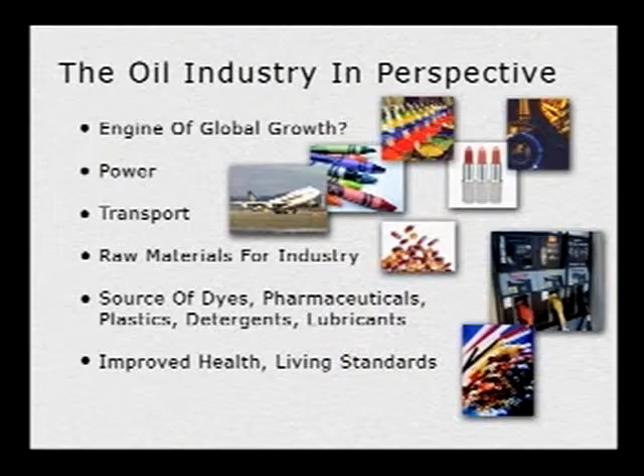And just a few of the sometimes trivial but sometimes extremely important things that oil produces, seen there. Of course, my flag carrier, Singapore Airlines there.

But let's talk about the public perception of oil. There is a big perception out there that oil companies are unscrupulous multinationals, that we as an industry show little regard for nature, and that the oil industry is dirtier somehow than other industries. And of course, there's a very common misconception that practical alternatives to oil exist.

This is the kind of stuff that we are all familiar with, the petrochemical industry, which of course is downstream from our own industry, but plenty of nasty pictures of industrial pollution. If we go back to our side of the business, on the upstream side, these are the kinds of things that you may see in newspapers. And unfortunately, it doesn't present a very good picture of our industry.

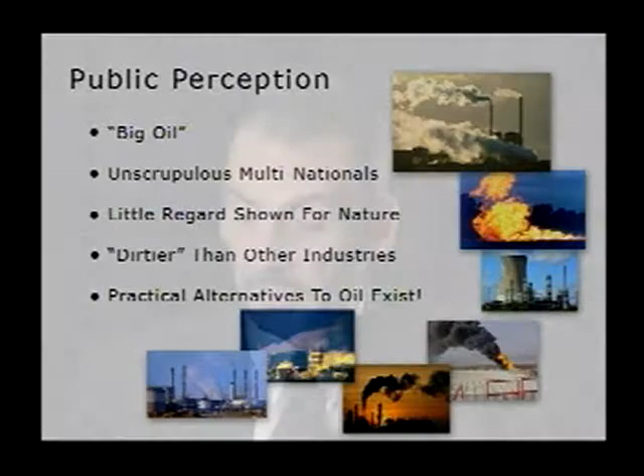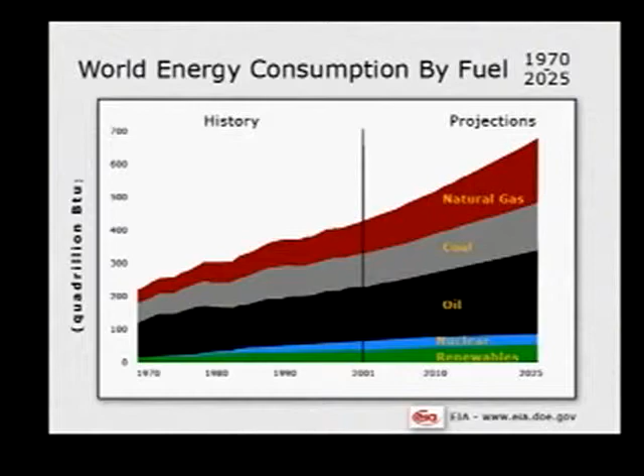But let's be serious. If you take a look at world energy consumption, then oil is going to be with us for a very long time. In fact, oil is going to increase in consumption over the next 25 years by some 50%. Natural gas also is going to increase, but you can see out of the overall proportion of the fuels that we're going to be using 20 years from now, the vast majority comes from hydrocarbon sources.

You may look down at the bottom of that graph and see renewables and think, well, that's good, we're moving towards renewables, and think of wind and solar energy. But in actual fact, the vast bulk of those renewables is hydroelectric and biomass. And in fact, the other fuels, the solar and so on, represent less than 1% of that total production. So oil is going to be around for a long time.

Now let's talk about the pollution issues related to the oil industry. There are many. Obviously, habitat disturbance and disruption is something that sees quite a bit of press attention. All the paraphernalia associated with our business of oil exploration. Then there is the decommissioning of facilities. And in the last slide there, you may have seen a picture of the Brent Spar, a famous structure in the North Sea that an oil company wanted to take out and dump in the Atlantic Ocean. At the end of the day, they were unable to do that due to extensive pressure from NGOs and the public.

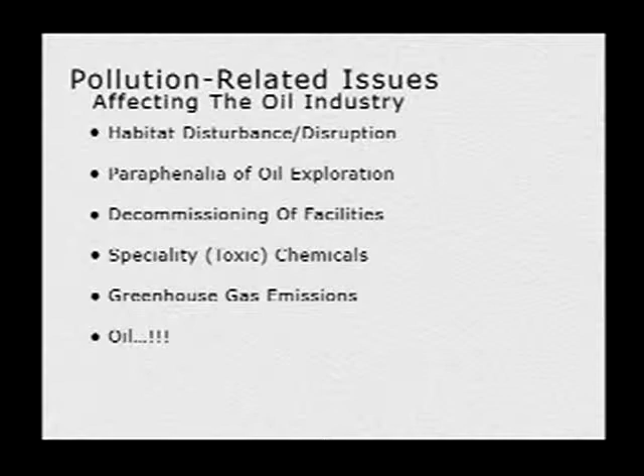The speciality and toxic chemicals that we do use in our business, of course, are something that we're going to talk about in this presentation. It wouldn't be right either to talk about pollution issues if we didn't talk about greenhouse gases. About 26 billion tons a year of carbon dioxide from our consumption of hydrocarbon fuels, and clearly that's an issue that's gaining a lot of press attention.

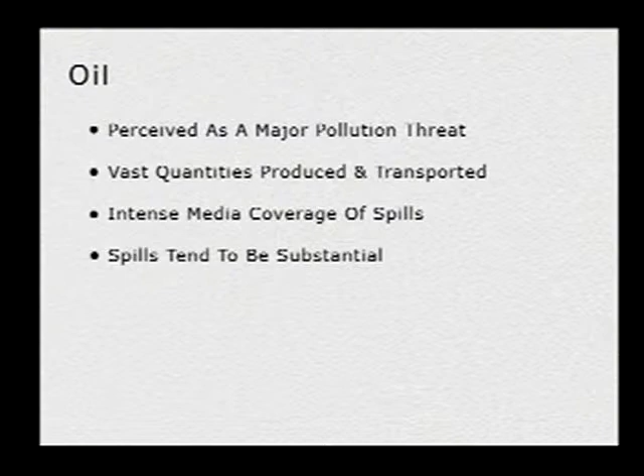Finally, there's oil itself, and that's really where we start to look at pollution. It is perceived as a major pollution threat. Vast quantities of oil are produced and transported. Currently, the world is consuming about 84 million barrels of oil a day. So obviously, the majority of the markets for that oil are far removed from the production areas, and it has to be transported.

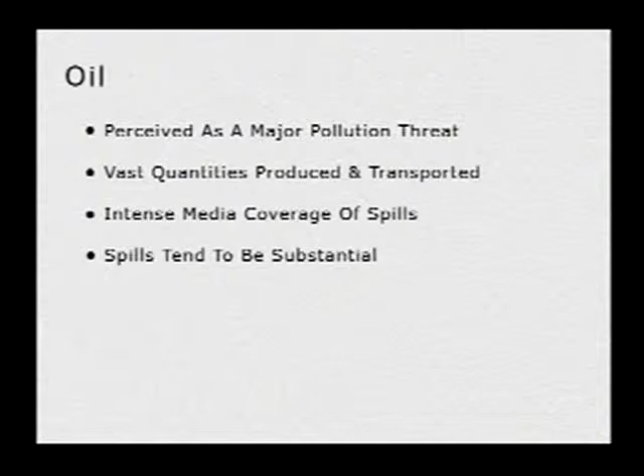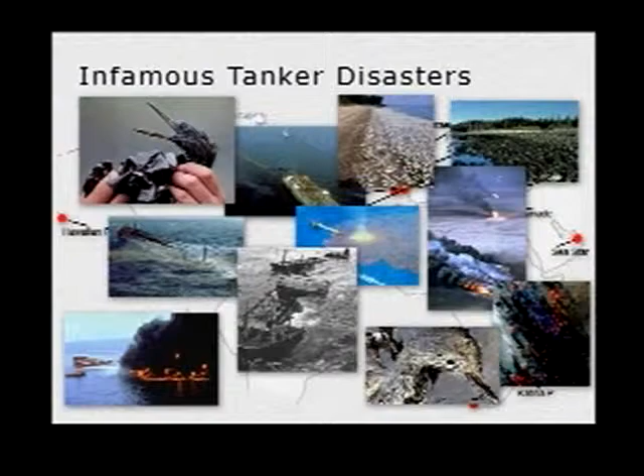When there is a problem, for example, a spill, there's intense media coverage of that spill. And those spills, because of the prodigious quantities that are required every day to feed our world, tend to be substantial. There are numerous infamous tanker disasters, and I have a map here showing some of them scattered around the globe. You may notice up on the far left-hand side the Exxon Valdez, a rather infamous accident. But there are many, and the kinds of pictures that you may see from tanker disasters, of course, are fairly common. Not very pretty.

Then there was the case of the retreating Iraqi forces in the first Gulf War, releasing a lot of hydrocarbon into the environment, deliberately destroying wellhead pressure control equipment, releasing a total of about 11 million barrels of oil into the Arabian Gulf, and a total of 150 million barrels of oil from the destroyed wells. And of course the consequences are, again, fairly well described in the press. These are the kind of pictures we're used to seeing.

But there are some facts that we need to consider. Oil is a natural product. It routinely seeps to surface in many, many places. In fact, many oil-producing areas were first discovered as a result of natural seeps to surface. Of the approximately 1.3 million tons of oil a year that enter the oceans, 600,000 tons are from natural seeps. In actual fact, we could even claim to help this situation by relieving the pressure from downhole reservoirs and reducing the seep rate into the oceans. So about 45% of the oil that enters the oceans comes from natural seeps.

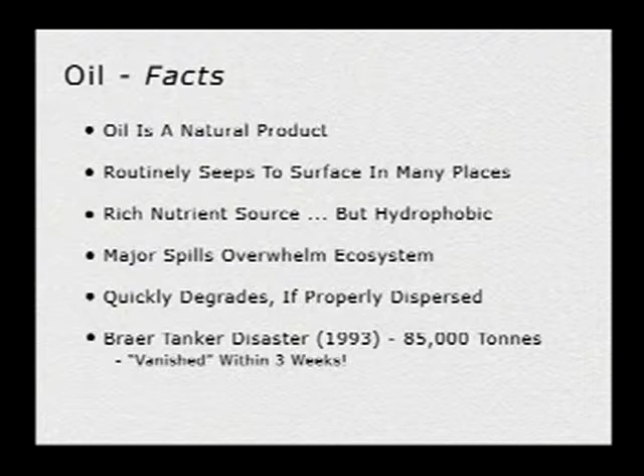If you look at the total input from our industry, that's the E&P industry, into the oceans, it constitutes about 38,000 tons per annum, about 3% of the total input into the ocean. So trivial in comparison with natural processes. Now, oil is a rich nutrient source, but it is hydrophobic. It repels water. And major spills tend to overwhelm the ecosystem for a short period of time. But it does quickly degrade if properly dispersed.

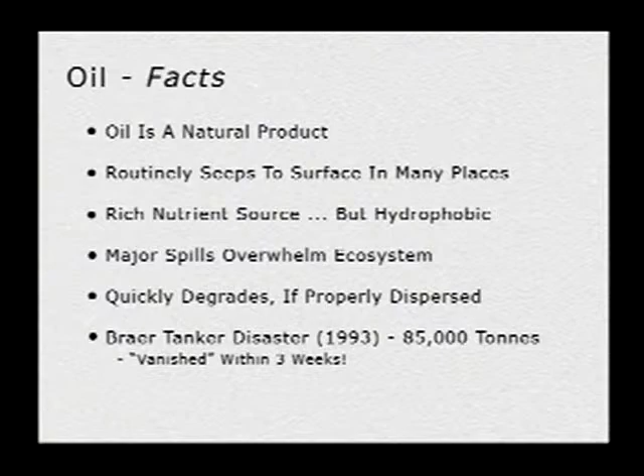In the Braer tanker disaster in 1993, a ship carrying Norwegian crude to a refinery in Quebec was caught in hurricane forces off the north coast of Scotland. She went aground, and most of her 85,000-ton cargo leaked out into the sea. Unfortunately, they couldn't do anything for days because of the extreme weather. They couldn't get near the wreck. Three weeks later, most of that oil had vanished. They could hardly find any traces of it whatsoever, proving the enormous power of the wind and waves and the ability to disperse and disrupt the oil slick.

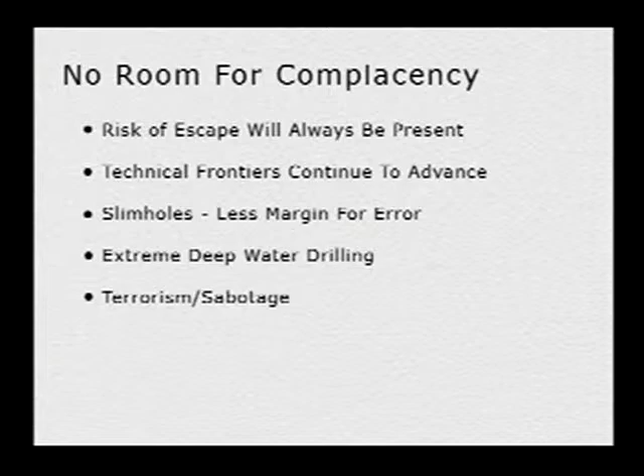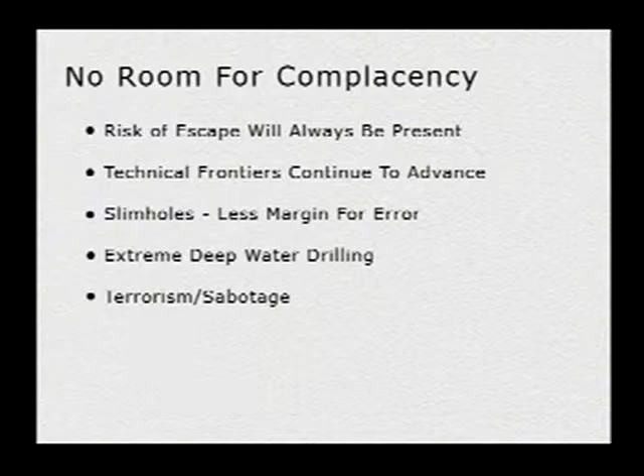But that's no reason for us to be complacent. There's always going to be a risk of escape, and we need to be very careful when we work in this business. The technical frontiers do continue to advance. We're drilling more slim holes with much less margin for error. And we're doing extreme deep water drilling. Some of those reservoirs are capable of producing at truly prodigious rates, wells potentially capable of producing 100,000 barrels per day. So if we lose control of one of those wells, we have a lot of oil to deal with. And then, of course, there is the ever-present risk today of terrorism and sabotage. That's trying to put the oil industry a little bit in perspective from a pollution perspective.

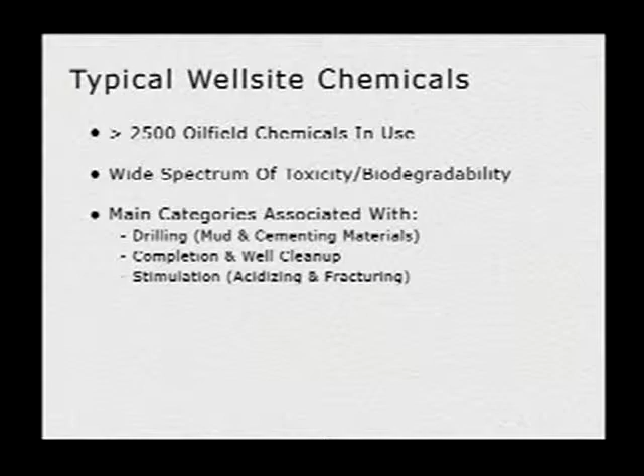I'd like to move on now into the arena of the wellsite chemicals and the second part of the presentation. There are about 2,500 oil field chemicals in use. It's a little bit of an exaggeration. In fact, there are 2,500 proprietary blends of oil field chemicals in use. There are probably about 1,000 individual chemicals in use in our business. And these materials have a wide spectrum of toxicity and biodegradability. The main categories that we are going to deal with today are the drilling chemicals, the mud and cementing materials, completion and well cleanup and workover materials, and stimulation materials for acidizing and fracturing.

Now, it wouldn't be right talking about chemicals without first describing some of the potential environmental risks from these materials and defining those terms. There are several different types of toxicity, so let's start out with acute primary toxicity. This is the kind that you would encounter from things like arsenic and cyanide, the classical poisons that you take a spoonful and you drop down dead. But not all materials act in this way. Some of them have much more insidious and much more persistent effects.

Clearly, if we put organic materials into the biosphere, there is an oxygen demand in order for these materials to be degraded. Then there's the biodegradation issues. Are these materials broken down by organisms in the environment? Are they broken down under aerobic conditions, where there's oxygen available, or anaerobic conditions? These are important issues because these two types of conditions can coexist. In the open ocean, materials may degrade perfectly well aerobically. That's under oxygen availability.

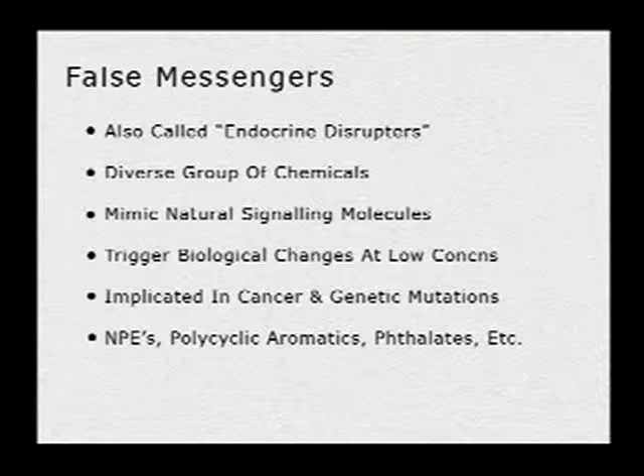These materials are excruciatingly powerful. Our own cellular systems are very, very sensitive, and these materials can trigger biological changes at very, very low concentrations. As a result, they've been implicated in things like cancer and genetic mutations.

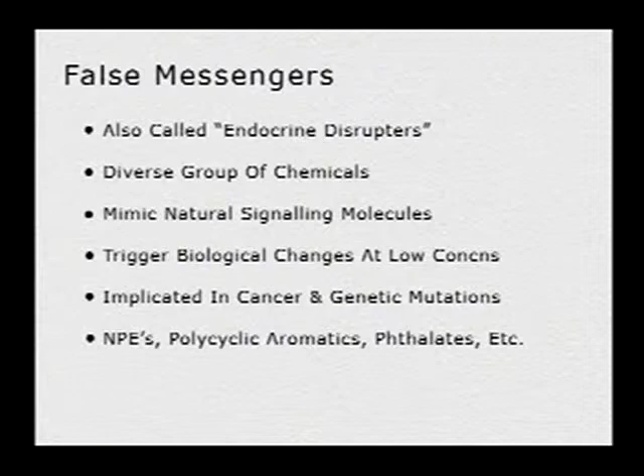There are several of these materials around in our industry, and I mentioned a few of them. The so-called NPEs, nonylphenol ethoxylates, never mind the terminology, polycyclic aromatics, and phthalates. These are three very, very well-known groups of chemicals, which unfortunately mimic the female sex hormone estrogen. Now, this is rather significant.

These are typical endocrine disruptors there, and on the far right-hand side at the top, you'll see para-nonylphenol. This is the base material for a vast number of non-ionic surfactants. Now, these nonylphenol ethoxylates have been banned from our industry for quite some time now in those areas where there is an active environmental protection program. We no longer use nonylphenols.

But although we've cleaned up our industry, it's worth pointing out that these materials are still in widespread use for many, many things. In the United States alone, we manufacture 200,000 tons of nonylphenol per year. So other people are using this material despite the fact that the oil industry is no longer using it.

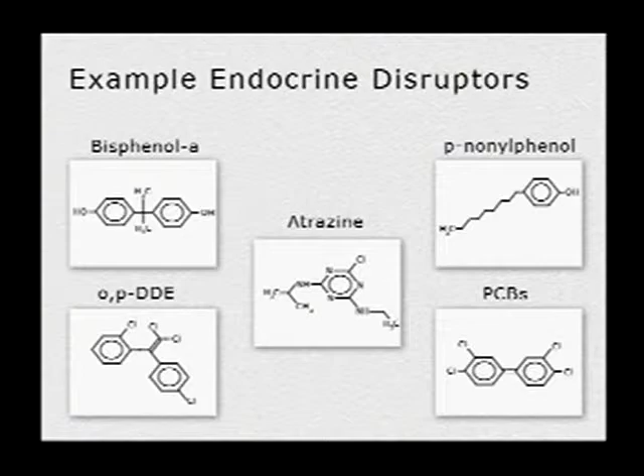Now, what do these things do? As you can see, they're a diverse group of materials, but it so happens that in three-dimensional space, these molecules all look similar to this famous female sex hormone estrogen. So they can mimic the effects of it. They fit into the lock, and they activate the mechanism in the lock, and they do certain things in our bodies.

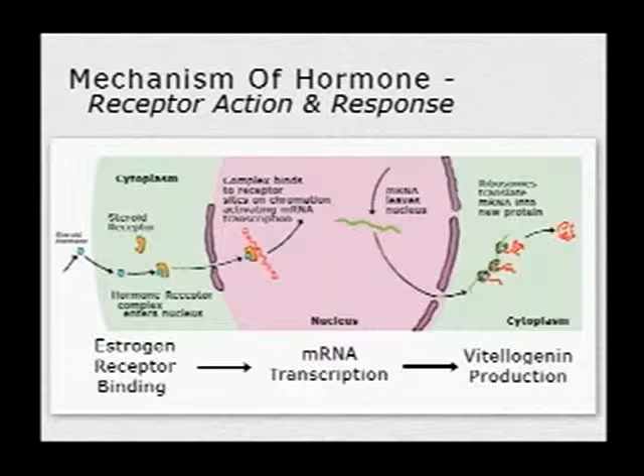I don't want to go into a biology lesson here, but this is the basic mechanism of action, where you have this material docking with a receptor, affecting DNA transcription and so on, and eventually producing proteins. This is how the system works. Who are the possible victims of this? Well, there's many possible victims, unfortunately. I put a few up here.

Now, there's a wide-ranging debate about the quality of male sperm in the human population, particularly in the industrialized world, and the falling sperm counts. And this may well, in fact, be as a result of the presence of these molecules that we're talking about in our environment. We're being exposed to them on an everyday basis.

Now, clearly, there are many things that have happened in those 60 years. Many more women are in the workplace. We have much higher marital breakup rates. There's a number of different stress factors that could contribute to these effects.

But nevertheless, this is also a period when we've undergone quite extensive industrialization. And this may or may not be implicated in the problem. Let's go on to these main categories that we discussed at the beginning.

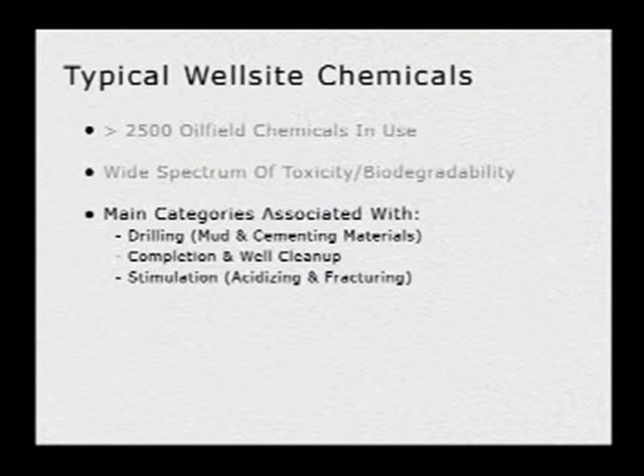I'm going to start off with drilling mud, the single biggest well site consumable. There are three main generic types of drilling mud: oil-based, synthetic oil-based, and water-based muds. And it's worth taking a look at the evolution of mud. Originally, mud was water-based. Very simple material. You just mixed up bentonite and water, basically, and drilled.

But, of course, problems using this type of formulation, drilling reactive formations. And there was a gradual move through the 70s and 80s towards oil-based muds and invert oil emulsion muds. Why? Because of very good lubricity and the fact they're unreactive with many formations. Now, until about 10 years ago, oil-based muds used diesel oil as the base fluid. But we mainly switched to paraffin oils, which have low aromatic content, to avoid some of the toxicity associated with diesel.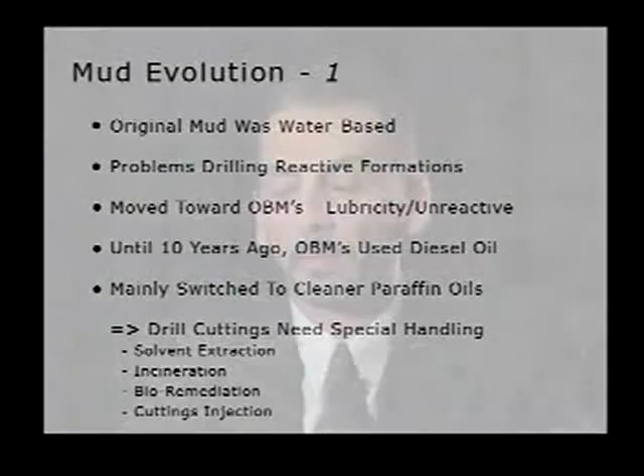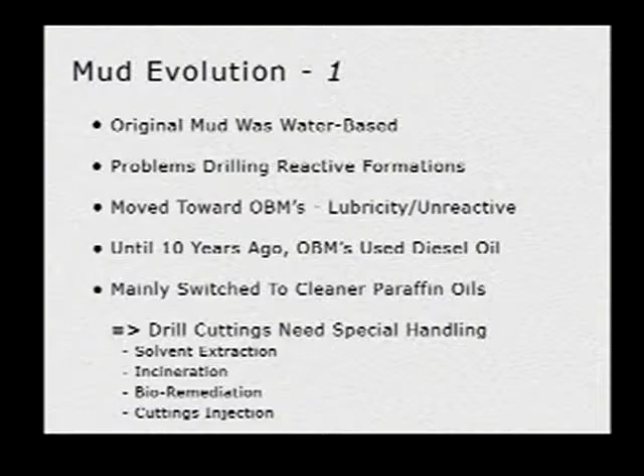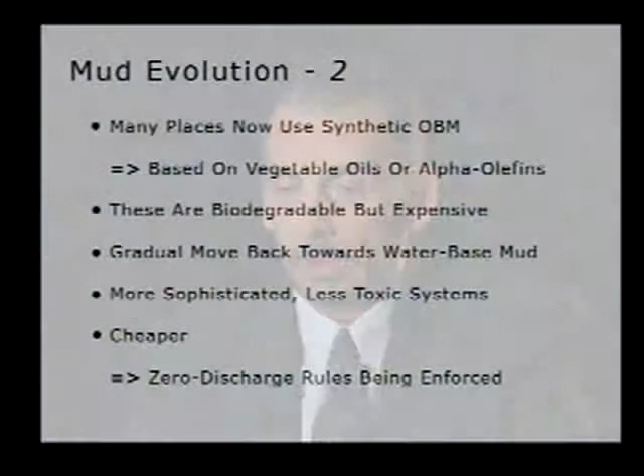Unfortunately, you still just can't dump this stuff. The drill cuttings need special handling. The drill cuttings, of course, are covered in a coating of this oil-based mud. So either you subject them to solvent extraction or incineration, or somehow you land farm them, or you do what a lot of people are doing today: you re-inject them. So you actually stick them back under the ground below any subsurface aquifers, and that's certainly a process that's growing in popularity.

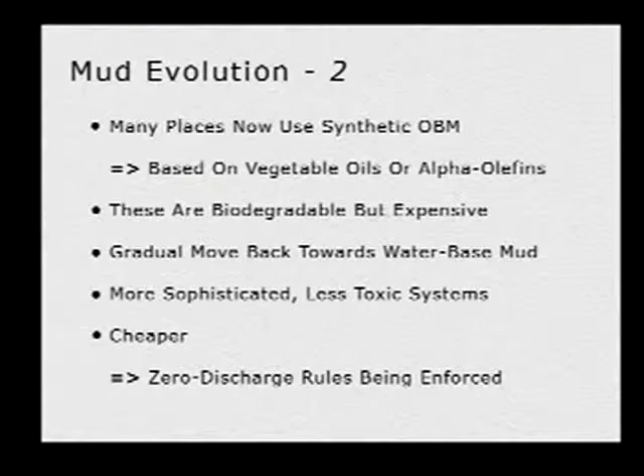But many places use synthetic oil-based muds as well. Now, these are based on vegetable oils, either esters or ethers or alpha olefins. They are biodegradable, and so that makes them a little bit better, let's say, but they are expensive. And unfortunately, or fortunately perhaps, zero discharge rules are being enforced in many parts of the world today. So you can't just put these materials over the side either. You have to do things with them.

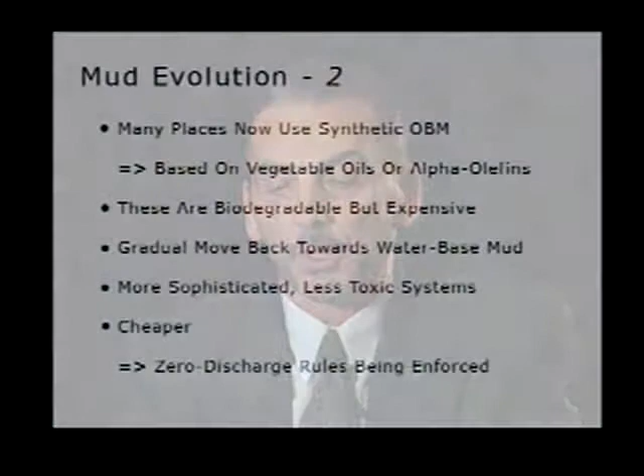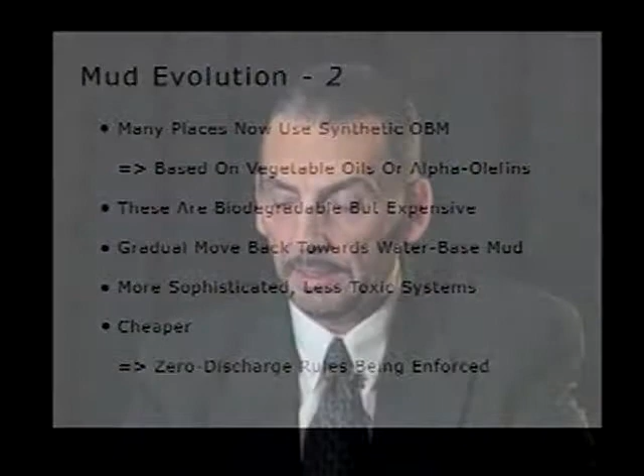So there's a gradual move back towards water-based mud, which is more sophisticated these days. We have chemicals to deal with many of the previous drilling problems that made water-based mud unattractive. And the benefit, of course, of water-based mud is it's a lot cheaper generally than oil, particularly today.

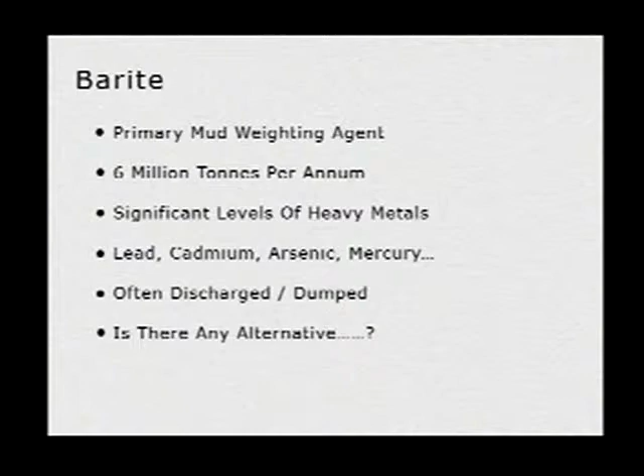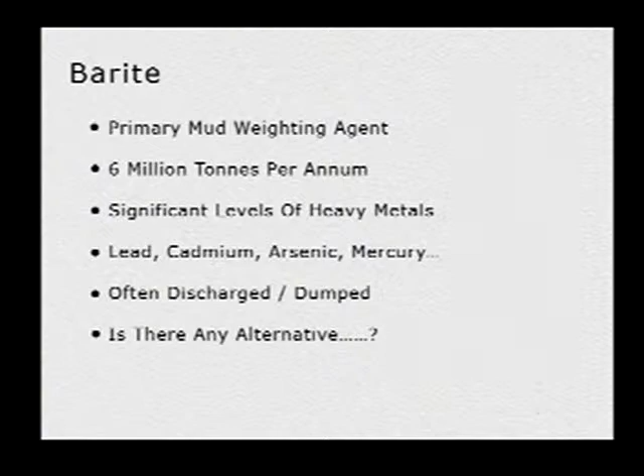What about the weighting agent that's in mud? You know, we're drilling into higher and higher pressure intervals. Obviously, we need weighting agents to maintain hydrostatic well control. Barite, of course, is the traditional primary weighting agent that's used in our business. About 6 million tons per annum of barite. Basically, the oil industry consumes about 97% of the world's production of barite. So clearly, we're a major user.

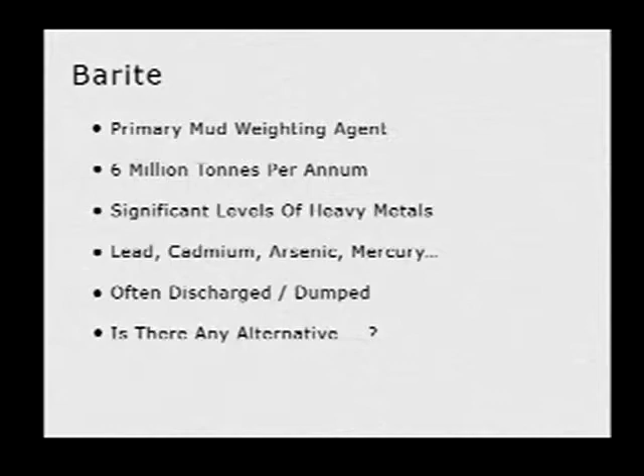Now, unfortunately, this material does contain significant levels of heavy metals, and I'm talking here cadmium, lead, arsenic, and so on. I say significant levels. We're talking in the parts per billion range, but nevertheless, if you're putting several million tons per annum into the sea, then clearly there's an issue there. Material is often discharged and dumped. So I ask the question, is there an alternative?

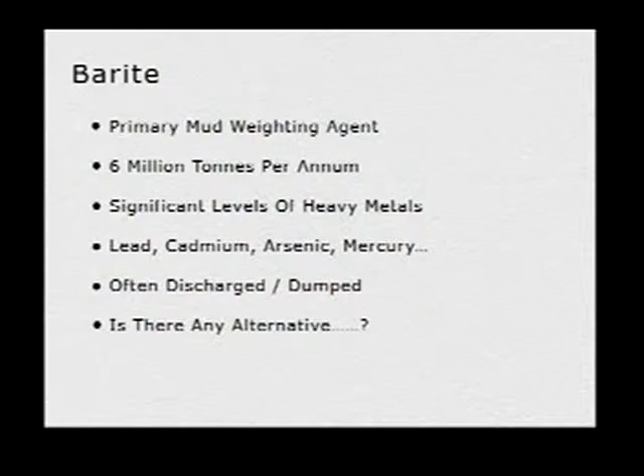Well, a few years ago, the Norwegians came out with a paper discussing an old traditional material, ilmenite, and its brother hematite, if you like. These are oxides of iron or iron and titanium. They've got much lower levels of heavy metal. They're significantly denser than barite, so you need less volume of them for any given mud weight. That results in a lower solid volume fraction in the mud, and therefore much better mud rheology.

What does that translate into? Improved drilling hydraulics, less environmental impact. So in general, why do we as an industry not move towards something like this? Something that certainly should be considered. Now, I want to put things a little bit in perspective again here and put my reality check cap on. There are many other sources of pollution.

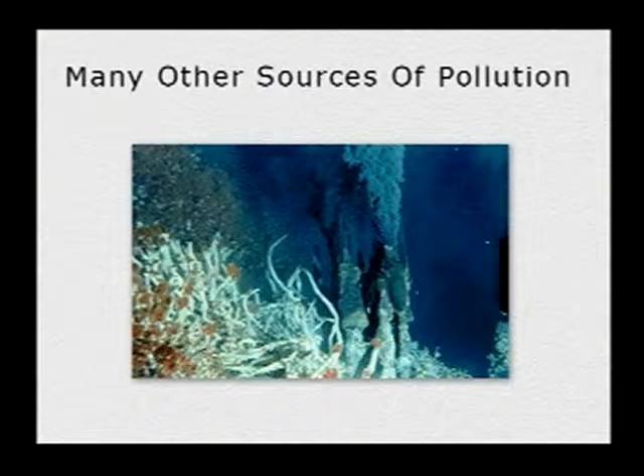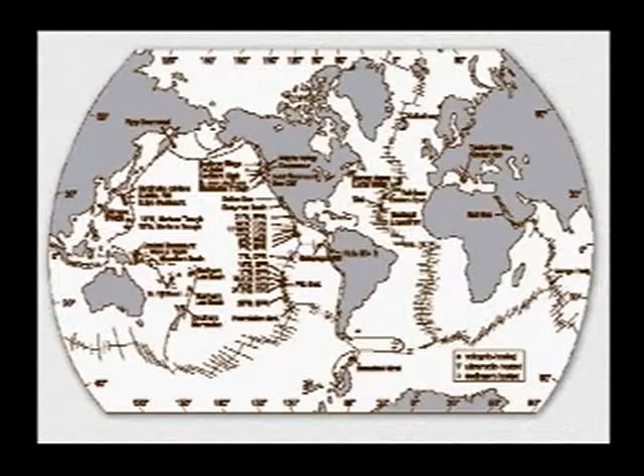Moving on from that into cementing chemicals. Well, the good news is cement and cementing chemicals are quite benign, which is just as well. Cement is the biggest commodity product in the world. It really is an enormous business. We're talking 2 billion tons of cement made per year. That's twice as much as there is steel made. And so clearly, everything around us in this world, we basically rely on cement and concrete for so many things.

It's clearly quite a benign material. And most of the additives that we use for well cementing are naturally derived products, derivatized celluloses, sugars, lignins. Most of these materials are quite benign. There are a few things which are or weren't so benign. I'm talking spacers and washes for mud removal, which historically used things like NPEs that we've mentioned already, the nonylphenol ethoxylates, and some other materials like the aromatic sulfonates. Largely, these wash materials have been replaced by much more bio-friendly materials, alcohol ethoxylates and so on.

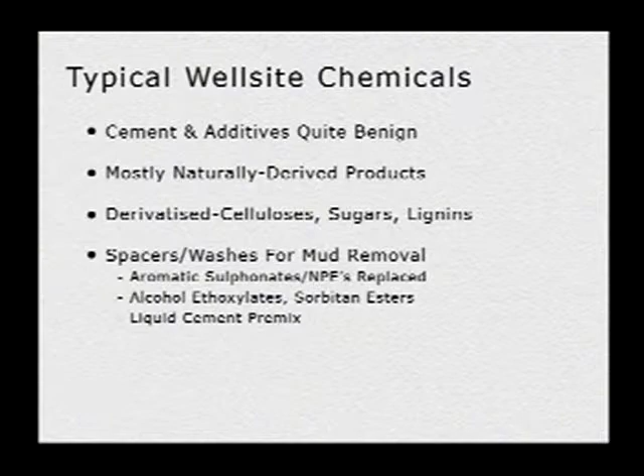I also mentioned there an interesting concept, the idea of mixing up the cement ahead of the cement job and taking it to location as a pre-mixed slurry, and that's something that we are capable of doing these days to even minimize the issues of dust and other pollution at site.

There's been some technology developments as well in the drilling business. We're doing more slim hole drilling, I mentioned that earlier on. That means less mud, less cuttings, less cement. Typically about 60% less of those materials per well if we go to slim hole versus conventional well architecture. Multilateral drilling, basically one mother bore and a bunch of daughter bores off of the mother bore. That results in fewer wells and obviously improved recovery, which is good news. Underbalanced drilling, less mud or potentially even no mud, and obviously less damage, potentially better productivity.

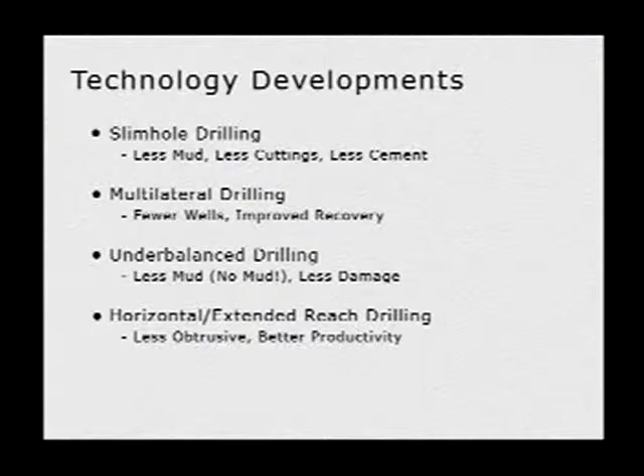Horizontal and extended reach drilling. Again, this is a technology that really in the last 20 years has taken off. Less obtrusive, better contact with the reservoir, better productivity. And this is a very famous project, Wytch Farm in the south of England, which is in an area of outstanding natural beauty, believe it or not. That's Poole Harbour there. And you may, in the middle of the picture, see the rig.

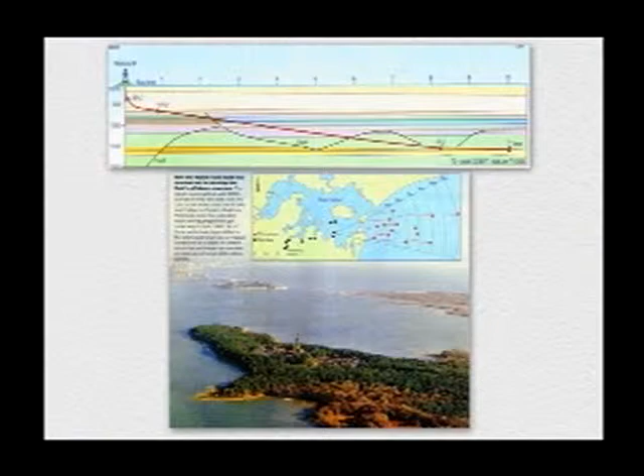Drilling 10-kilometer wells out under Poole Bay and tapping reservoir that's, as I say, 10 kilometers away from them. Quite incredible. They wouldn't have been able to do that. Certainly you would not have been able to take an offshore platform and build it in Poole Harbour, I can assure you that. But anyway, they were able to do this. This is a BP development, and they've done that very successfully.

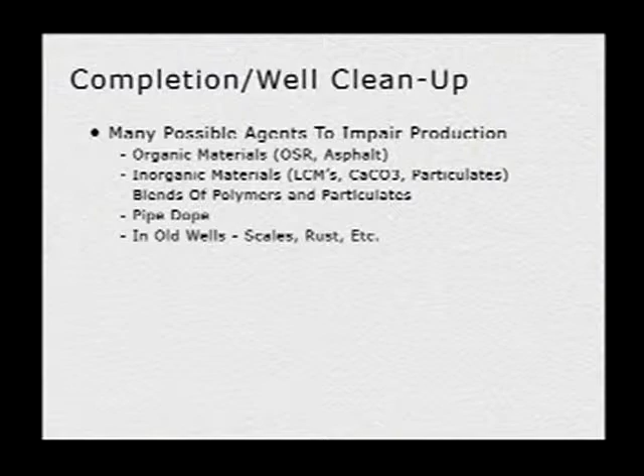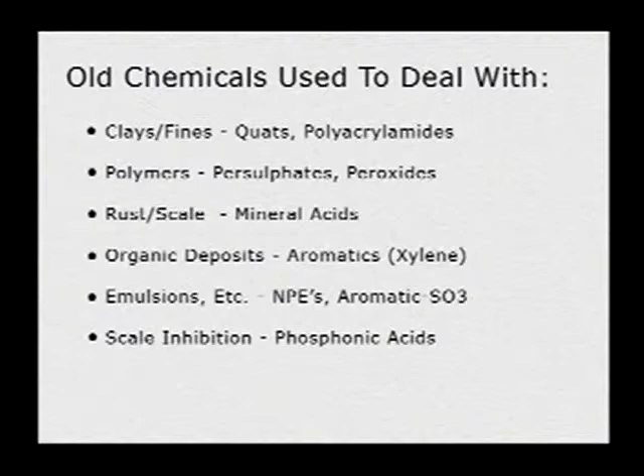Moving on from the drilling process to well completion and cleanup, there are many agents that can impair production that we have to address in the process of the completion or cleanup or workover, and I've mentioned a few of them. I'm not going to read them. Historically, the chemicals that we dealt with those materials with are, as you can see listed there, all kinds of interesting materials. Flocculants like the quats to get rid of clays. Polymers there, I mentioned the oxidizing agents. Rust and scale, mineral acids like hydrochloric acid. Organic deposits, aromatics like xylene and toluene, and so on through the list there. You can see quite a cornucopia of materials, most of them pretty nasty.

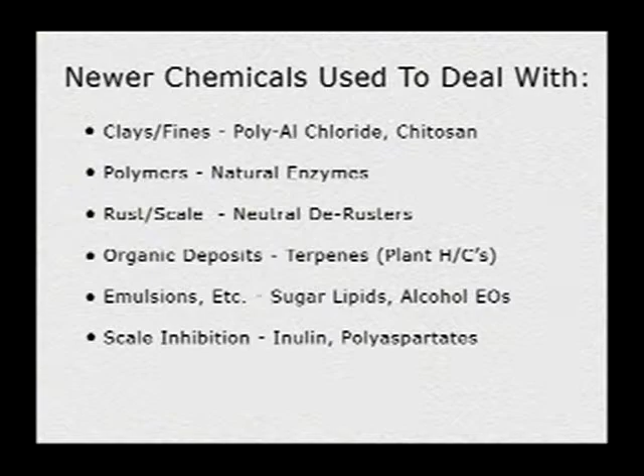Well, nowadays we're using a lot less of those materials, a lot more of these materials. So we're using things like polyaluminium chloride as a flocculant, natural enzymes, which are completely biodegradable, to destroy and degrade polymers. Neutral derusters to dissolve rust, so we don't need corrosion inhibitors. For some of these organic deposits, we use terpenes, which are plant hydrocarbons based on things like orange oil, believe it or not. These are very, very good solvents, and they are, of course, biodegradable. And, as I say, I mentioned several of the other materials there. I'm not going to talk individually to each one, but you can see clearly we're using a lot of biodegradable materials these days.

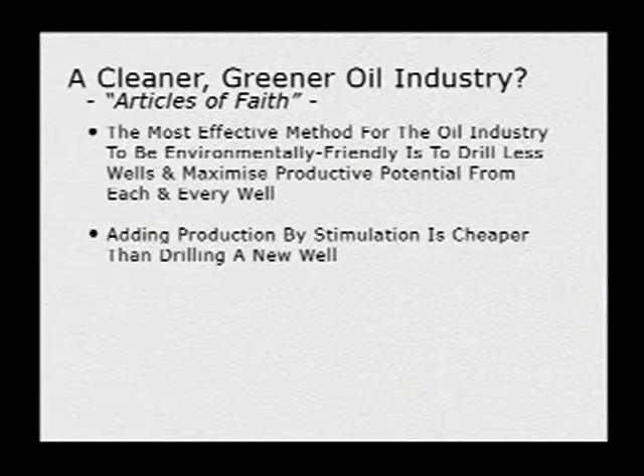Talk first of all about acids. Acids actually represent an acute spill problem. They are quickly neutralized or absorbed in the biosphere by the buffering capacity of the biosphere. But what is much more problematic are the corrosion inhibitors that are incorporated in the acids. And of course, when we take returns back, some of those corrosion inhibitors also come back with the acid and therefore pose a disposal problem.

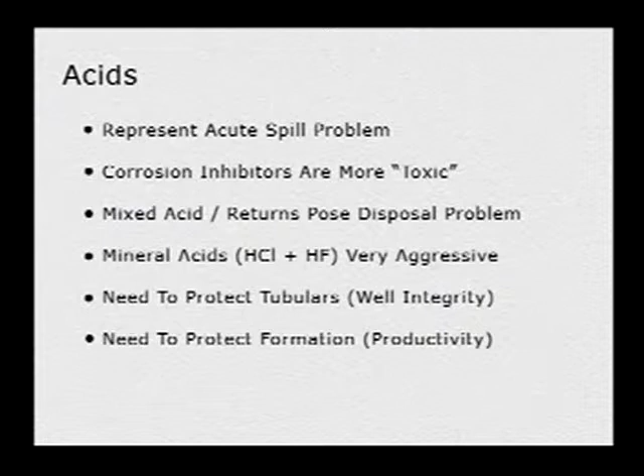Why do we need corrosion inhibitors? We need them because mineral acids are very, very aggressive. I'm talking HCl and HF. And we need to protect our well tubulars to maintain well integrity. At the same time, we need to protect the formation, because if we don't use corrosion inhibitors, we're going to dissolve a bunch of iron off the pipe. That iron is going to end up in the formation and is going to damage the formation. So we need to use these materials if we use aggressive acids.

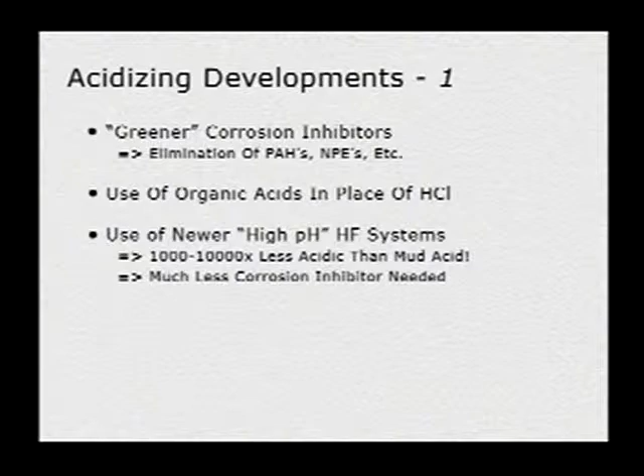Well, quite a few developments. First is that we've got greener corrosion inhibitors. We've removed a lot of the polyaromatic hydrocarbons, the NPEs and so on, that were part and parcel of these corrosion inhibitors. So we've got a lot greener in that sense. But some other things we've done is we've moved a lot more towards organic acids in place of hydrochloric acid, things like acetic and formic, which are biodegradable. We're also using high pH HF systems now, which are 1,000 to 10,000 times less acidic than mud acid, conventional HCl HF. So therefore you need less corrosion inhibitor. Again, that's got to be good news.

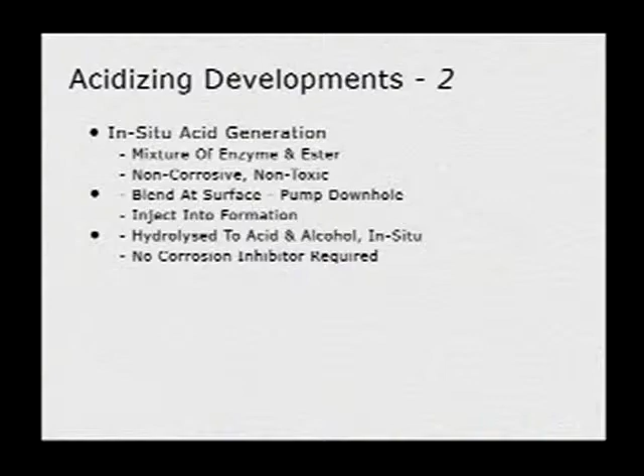A technology that's at least 15 years old now, but that is occasionally resurrected, is the idea of in situ acid generation. Basically, you mix an enzyme and an ester, you pump them downhole, you don't have any acid on the surface, so you don't need any corrosion inhibitor, and the acid is generated in the formation as a result of hydrolysis and time and temperature.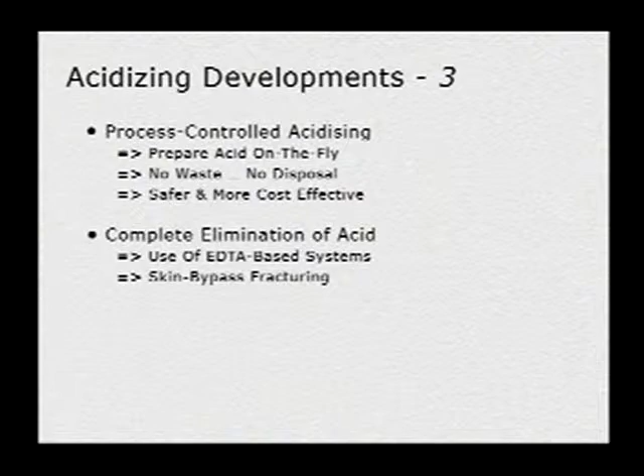Other developments include things like process-controlled acidizing, where we prepare acid on the fly. We don't have any waste, no disposal, and it's much more safe and much more cost-effective. We don't have lots of tanks of acid out there on the rig site.

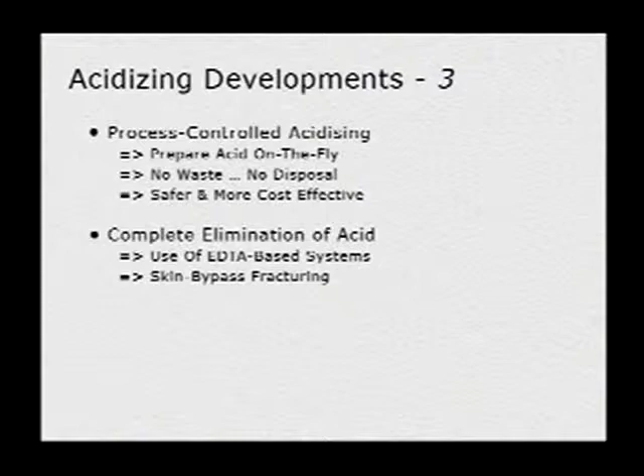Some people have even moved to the complete elimination of acid using chelate-based systems based on EDTA or its analogs, and these are capable of dissolving many oil field scales and so on in the same way that acid can. Potentially also we can move away from acidizing and do some small-scale fracturing, and skin bypass fracturing is one example of that, which brings me conveniently into fracturing technology.

We've done a lot here, in fact, in fracturing technology. Instant fracturing fluids, the elimination of toxic metallic cross-linkers, the ability to prepare fracturing fluids on the fly, on location, without having to mix up lots and lots of frac tanks and use lots of biocides and so on. The use of biodegradable surfactant frac gels, and the use of lightweight buoyant proppants.

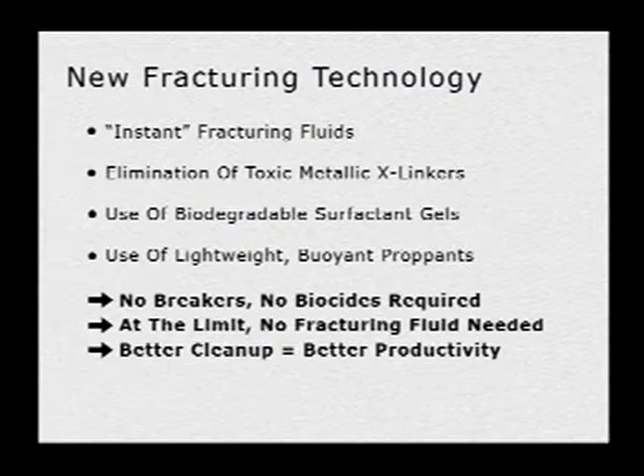These are interesting materials because potentially we don't need the frac fluid for transporting the proppant anymore. We may not need any breakers, therefore. No biocides. At the limit, no fracturing fluid at all, right? Better cleanup, better productivity. Clearly, that's a little bit of a leap of faith, but that's the way the industry is moving, which is interesting.

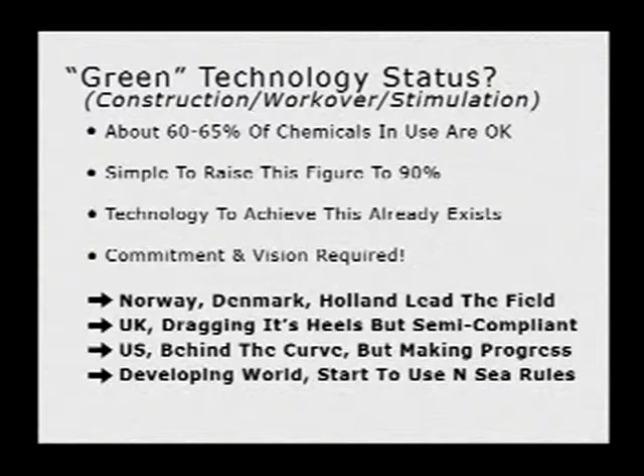Okay, so let's take a stock check of where we stand today with green technology as far as well construction, workover, and stimulation are concerned. About 60 to 65% of the chemicals we use today are, in fact, okay. But it's relatively simple to raise this figure to 90%. The technology to achieve this already exists, and all that's required actually is some commitment and vision on behalf of the industry.

If you take a look around the world, the Scandinavian bloc countries in Norway, Denmark, and Holland lead the field in terms of environmental compliance. The UK is actually dragging its heels a little bit, but it is semi-compliant. The US is behind the curve, but starting to make some definite progress in recent years, certainly over the last 10 years.

Surprisingly enough, in the developing world, we're starting to see them leapfrog over the rest of us. They're actually applying North Sea rules in some of the developing world, and that's ahead of many other so-called developed countries, let's say. So these countries are actually starting to apply the rules that have been set up in the North Sea, which are amongst the toughest environmental rules in the world.

But there are some barriers to progress. How do we move ahead with this environmental compliance issue? Interestingly enough, one of the biggest barriers to progress are the regulatory authorities themselves. It would always be nice if we could revolutionize these technologies, but we can't do that. Sometimes we have to make incremental changes, incremental improvements in these technologies and the use of chemicals and so on.

The regulatory authorities would rather have us make quantum leaps. Well, we can't do that necessarily. So they have to allow us to make these incremental improvements. And this is difficult today under the current legislation.

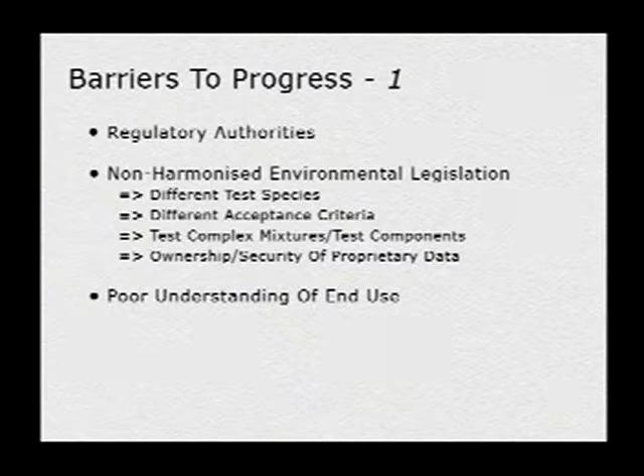And then there are issues of ownership and security of proprietary data. I mean, clearly this is a commercial business, and companies don't like to provide the formulations of their specialty chemicals to government departments. There's also a poor understanding by many people in the regulatory authorities of the actual end use of the materials that we're trying to get certified.

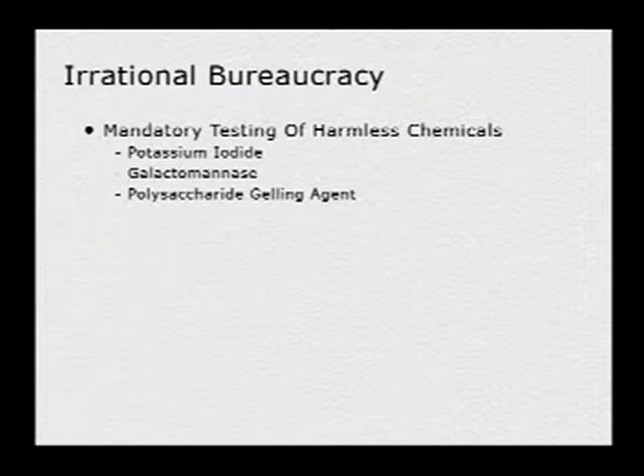I'll give you a few examples of that here. This is what I call irrational bureaucracy, the mandatory testing of harmless chemicals. Now, you have to understand that these chemicals all have to be tested for several different things: for toxicity, as I mentioned, biodegradation, bioaccumulation. And these are some of the materials that we've had to test over the years. It's very expensive to do this testing, by the way.

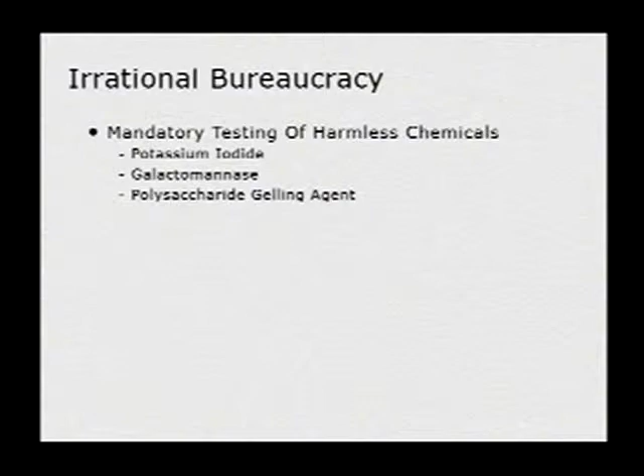Potassium iodide, which is a corrosion inhibitor aid. Potassium iodide is actually extracted from the sea. It used to be extracted from seaweed, but that's where it comes from. It comes from the sea. It's a normal constituent in the sea, and yet to try and put it back into the North Sea, the Norwegian government had us retest it for toxicity.

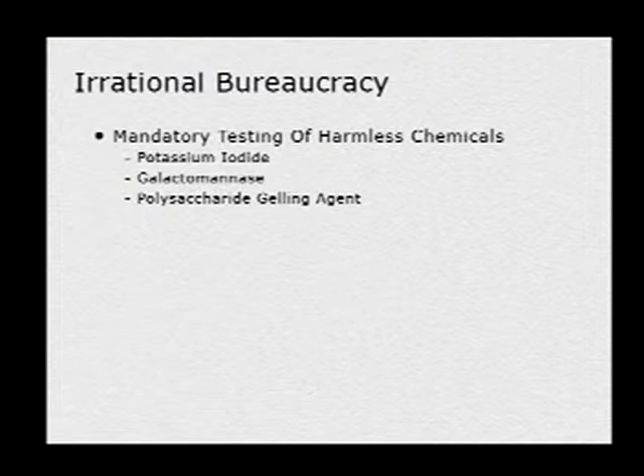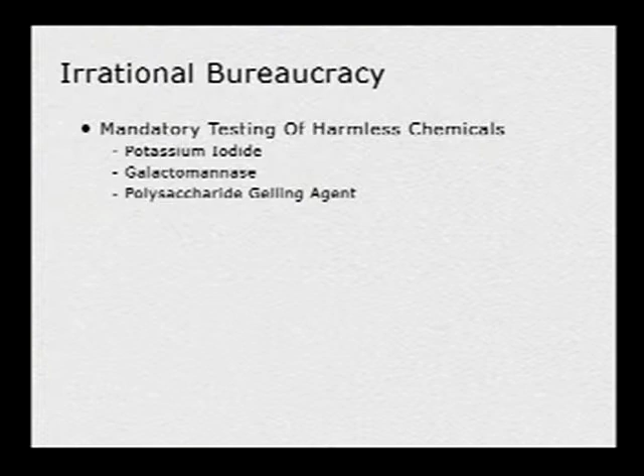Galactomannase, which is an enzyme that's used for breaking down fracturing gels, is a material that's actually also used in the coffee industry to improve the filtration rate of freeze-dried coffee, but guess what? We had to test it. A polysaccharide gelling agent, a suspending agent that's widely used in the industry. This material is made from seaweed. And again, we had to test it for toxicity before we could use it and put it back potentially into the sea.

So this is the kind of stuff that is actually a problem, certainly for us in the service sector, testing materials, which is rather expensive. Now, that brings me on to this issue, cost. Who pays for the development? Well, here in America, there's a great expression: there ain't no such thing as a free lunch, and there's nothing truer than that. Ultimately, the operating company and I guess the public pays for the development, but it's difficult at the moment to see how we get recompensed in the service sector.

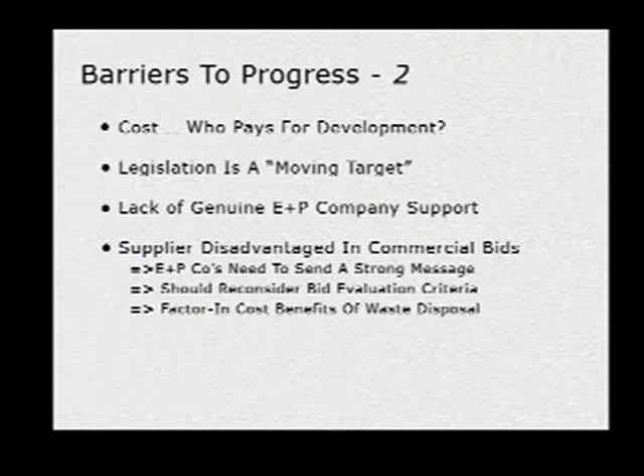The legislation is a constantly moving target. In fact, what's good today is not necessarily good tomorrow in terms of testing and all the certification that you get. Now, I have to say that there is a lack of genuine E&P support, and that's where most of the operators in the room walk out. The supplier is disadvantaged in commercial bids. And I believe that the E&P companies need to send a strong message. They should reconsider bid evaluation criteria and should factor in the cost benefits of waste disposal. This is an important issue that needs to be addressed.

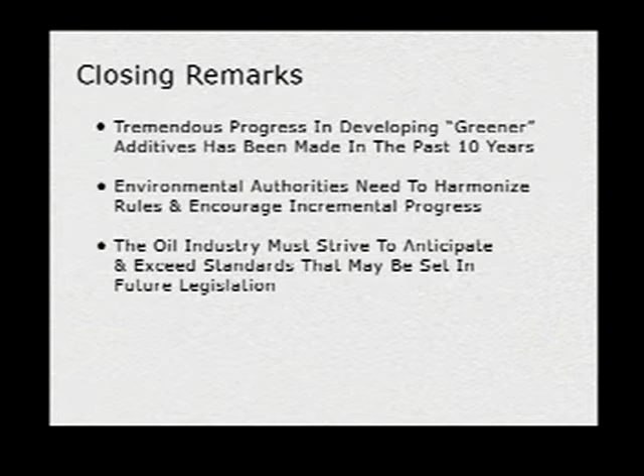So just some closing remarks. I think we've made some tremendous progress in developing greener materials over the last 10 years in particular. I think that the environmental authorities do need to help us out by trying to harmonize the rules and to encourage incremental progress, as I commented earlier. And the oil industry, and that's all of us in the service sector and the OPCO sector, must strive to anticipate and exceed the standards that may be set in future legislation.

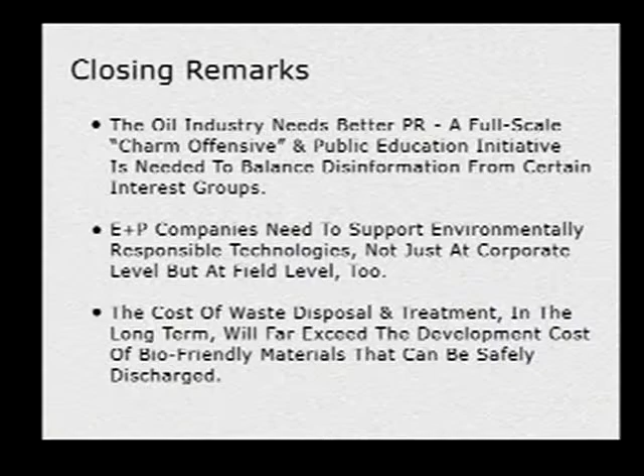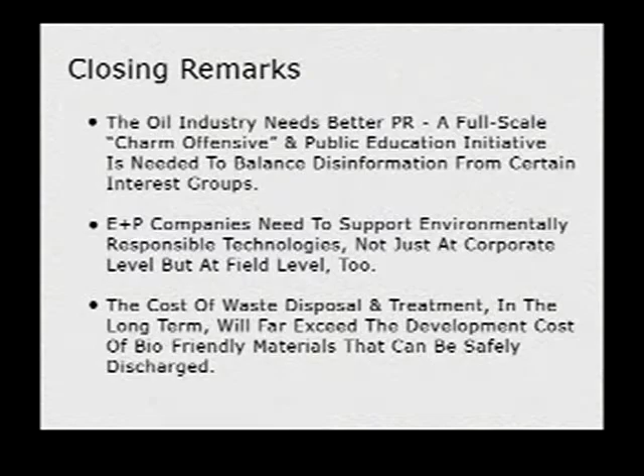Going back to the beginning of my talk, I think the oil industry needs better PR. We need a full-scale charm offensive and public education initiative to balance the disinformation that's put around by certain interest groups and NGOs. I think we can do that, and I think we need to do that. The E&P companies do need to support environmentally responsible technologies, not just at the corporate level, but at the field level too. No point just having lip service here. This is the real world. And the cost of waste disposal and treatment in the long term will far exceed the development costs of biofriendly materials that can be safely discharged.